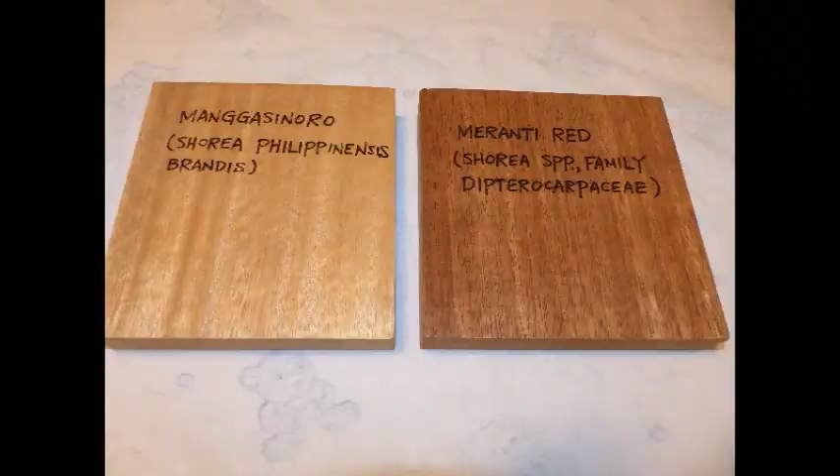This is the stock we're going to use. It's from a project long ago. I used to do fire testing, and this is left over from samples. They're 6" by 6" by 1".

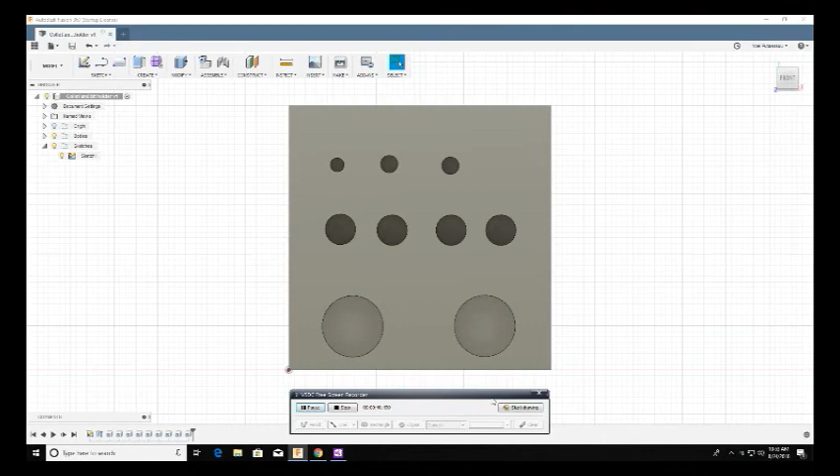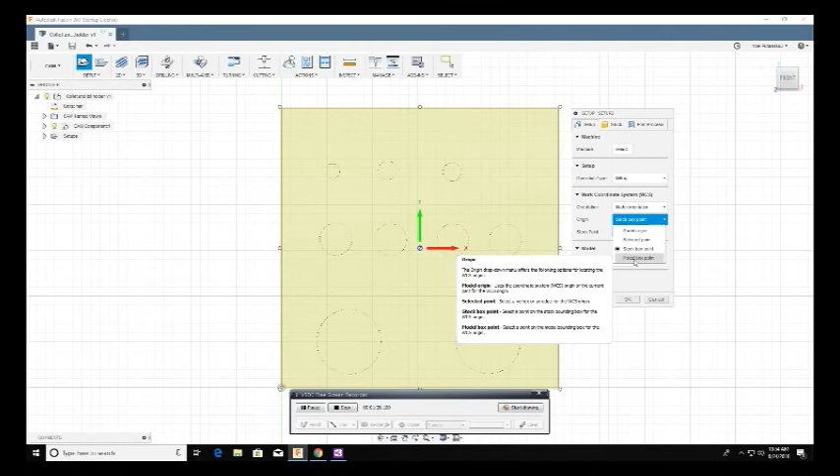I did the model in Fusion 360, and I didn't think anybody would have the patience to watch me model this. But I'm doing the tool runs in Fusion 360, and this is the process that I do the tool runs. So I switch over to CAM, and I'm going to pick the boring tool. Now before I do that, I have to go in and pick the work coordinate system. So that picks the origin, which is going to be at the top of the material, lower left hand corner.

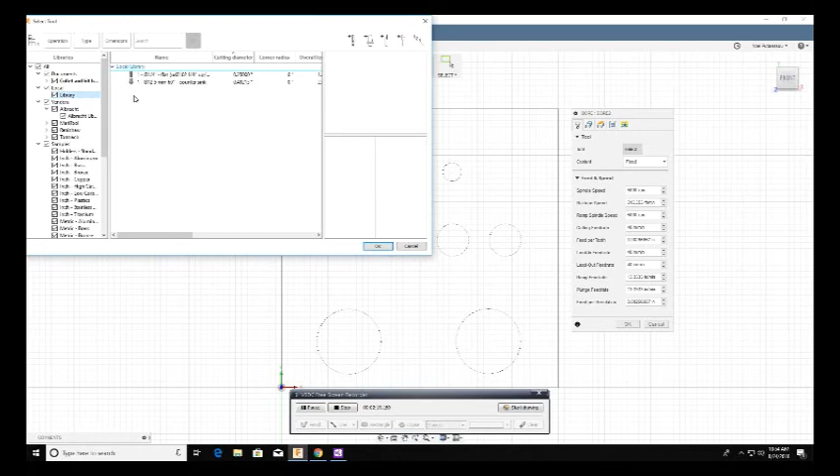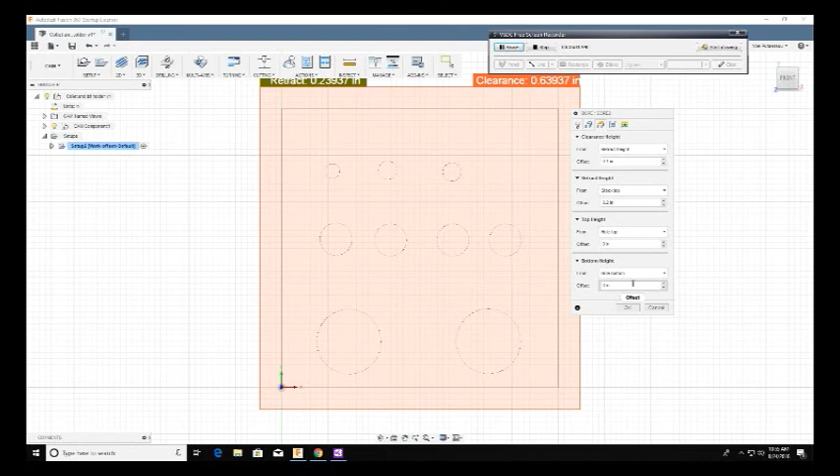And then another thing I have to do is make sure I pick the units, because it defaults to millimeters and currently I'm using inches. The bit I'm using is an upcut 1/4 inch end mill. Once you have the bit picked out, it brings in its RPM and other attributes, and that picks out a lot of the other variables. You just want to go through and make sure they make sense to you, because it does a fairly good job of picking the variables. Now I went through that whole process and didn't pick out my tool paths. So here I am picking out my tool paths.

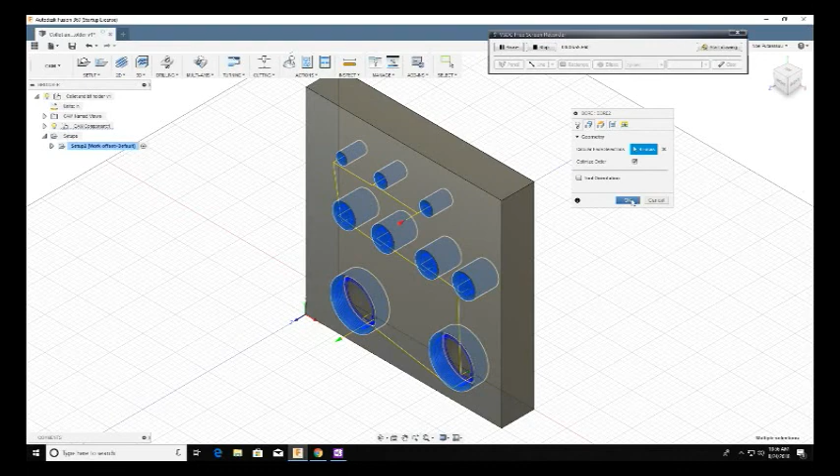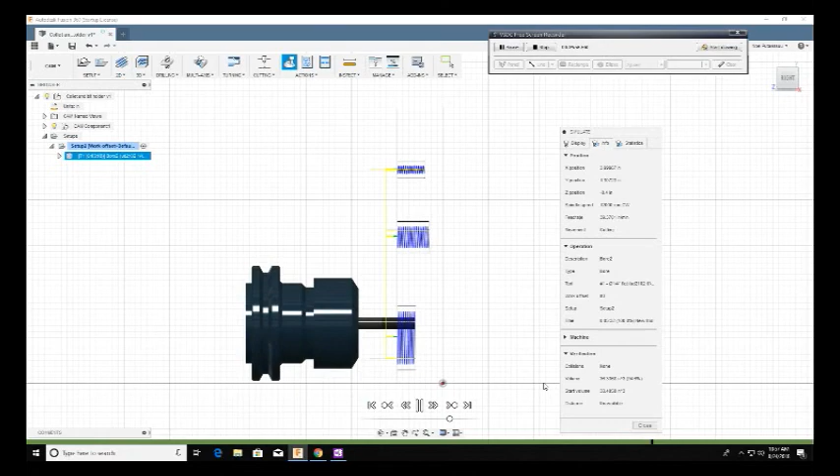I do a simulation to help figure out what order the pockets are going to get cut out, and is the tool going to go through the material. Does it look halfway decent? Because you'll find sometimes when you do the simulation you find a problem that you have to redo it. I always do a side angle so I see if it's going to go through the material. Everything looks okay.

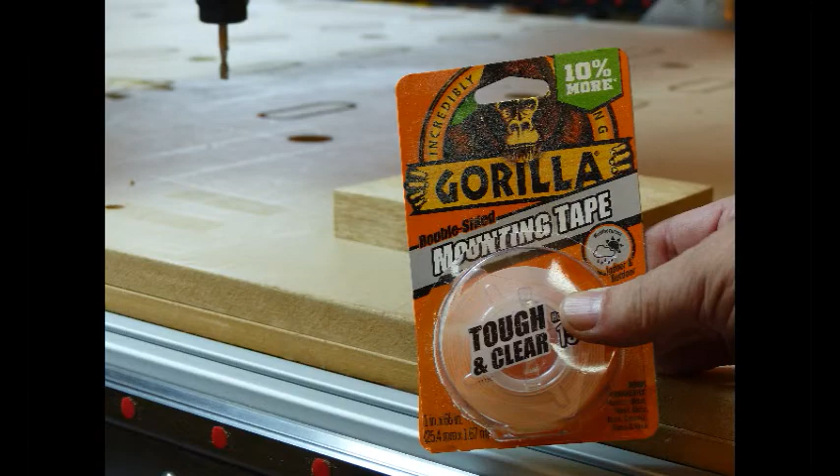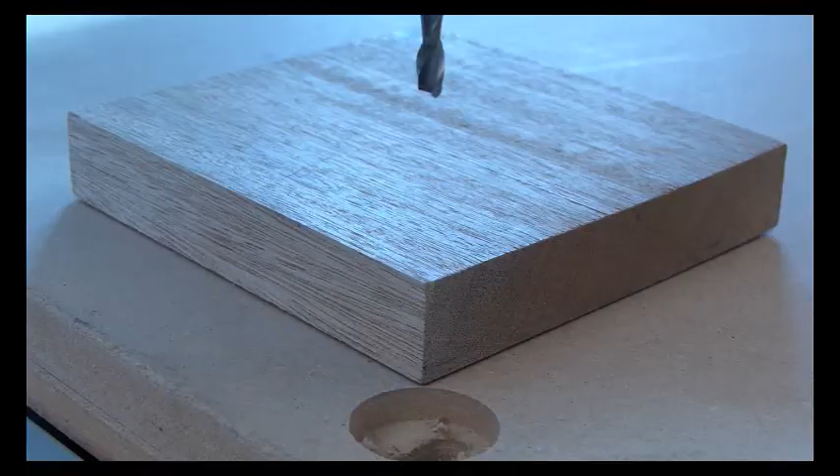Mounting on the spoiler board, I used Gorilla Tape. I find this to be pretty good. There's 2 spots there, and as soon as I touch the stock to it, it sticks. And I have a tough time getting it squared up because it sticks rather well. So I apply some pressure, and it looks like it's there. I also get all the dust off the table and off the stock.

Now I've turned the sound off on the table because it is screechingly loud and would not allow you to hear me over it. So I found that I have to just silence the audio from the camera.

I'm really pleased with the diameter of the circles. These circles, or these holes, are far better than I could drill with a drill press and a drill bit. You know, the character of the side wall is just fantastic. The boring tool does a very good job of making pretty side walls. Yes, the upcut end mill does tend to put some fibers straight up, but those are easy to take down with a sander.

But I'm starting to see a problem. If the hole is significantly more than 2 tool diameters, you'll get a post in the center. And that became evident about here, but it looks like it took care of itself. These holes are roughly 0.74 inches in diameter.

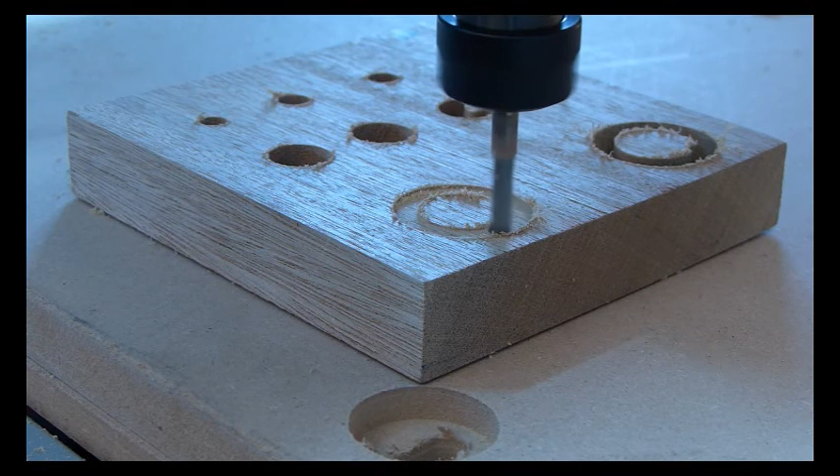These holes are something like 1.4 inches in diameter. Now let me measure. Yes, 1.4. I'm noticing it's leaving a lot of material in the center, so I'm starting to come up with a plan as how to remove that material. And if I don't turn the machine off and I don't re-zero the axes, the machine will know exactly where these posts are. Beautiful round holes.

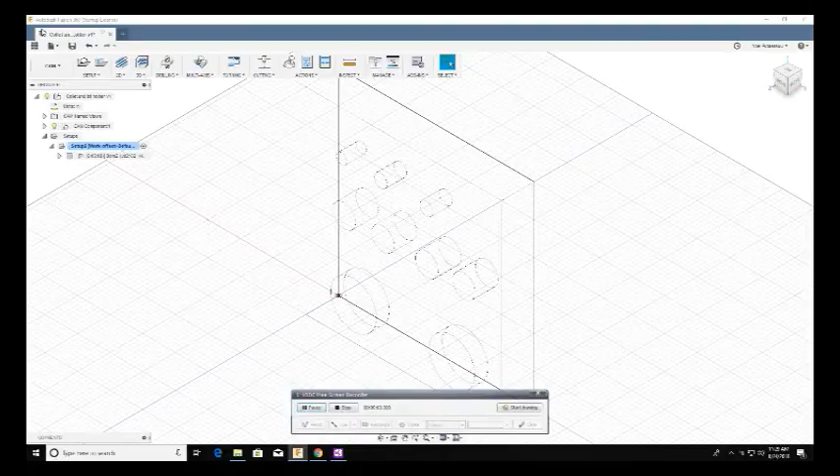Okay, I went back into Fusion 360 and I'm coming up with a new tool path. My experience with Fusion 360 is that I take 2 steps forward and 1 step back, and you'll see that here. I can also talk about climb versus conventional milling. There's a checkbox for doing climb or conventional milling.

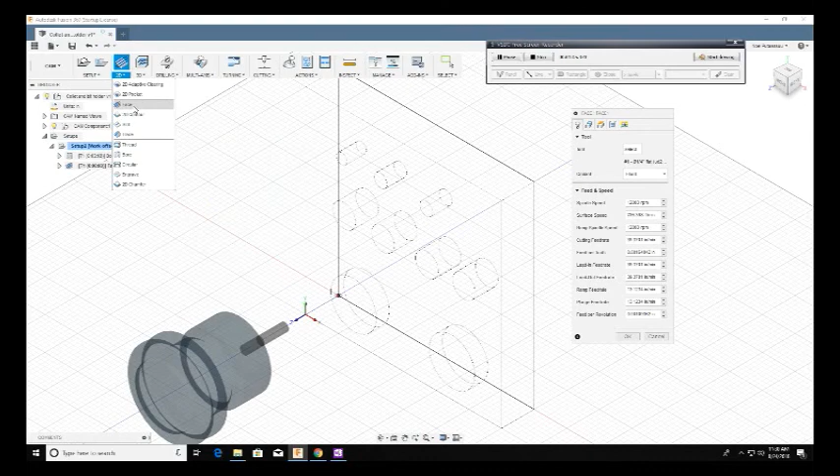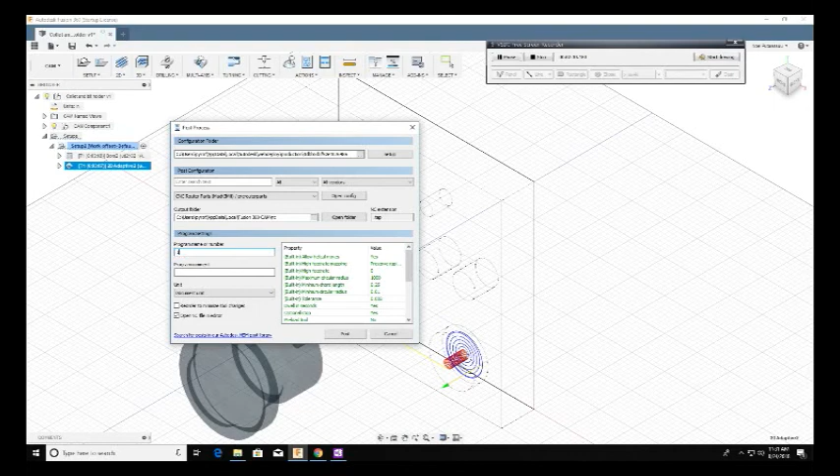If you think of the clockwise rotating bit, on the left side you're working against the rotation on the edge of the material, and on the right side you're working with the rotation. If you're going with the rotation, it's called climb milling, and if you're going against the rotation, it's called conventional milling. And conventional milling appears to have the best finish.

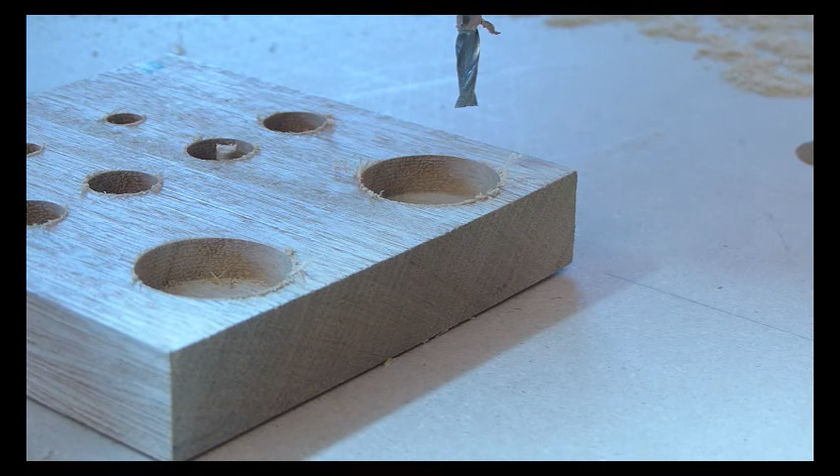It's just cleaning up the floor and then it's done. And I check to see how things fit.

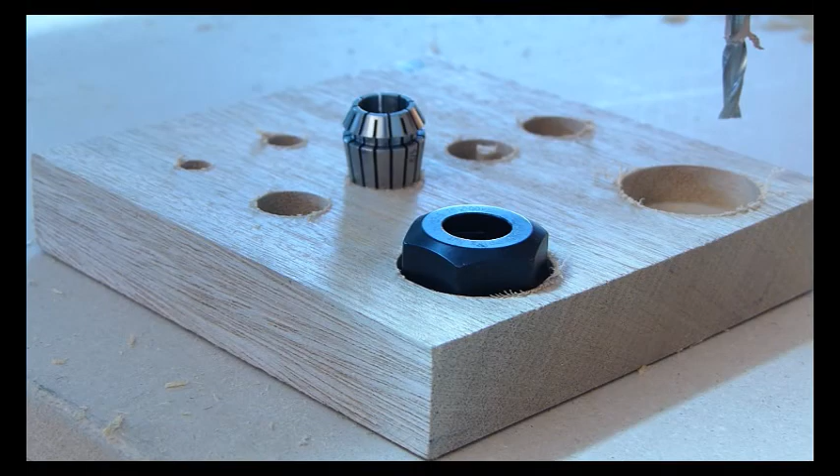This is the redwood, and I'm noticing that my camera is not picking up the red character of the wood. I'm going to work on my lighting. But this is a 1/4 inch end mill, same upcut end mill, and I'm making a hole that is just slightly larger, like 0.3 or something like that. But it makes quick work of the holes. I think I made these 0.6 inches deep.

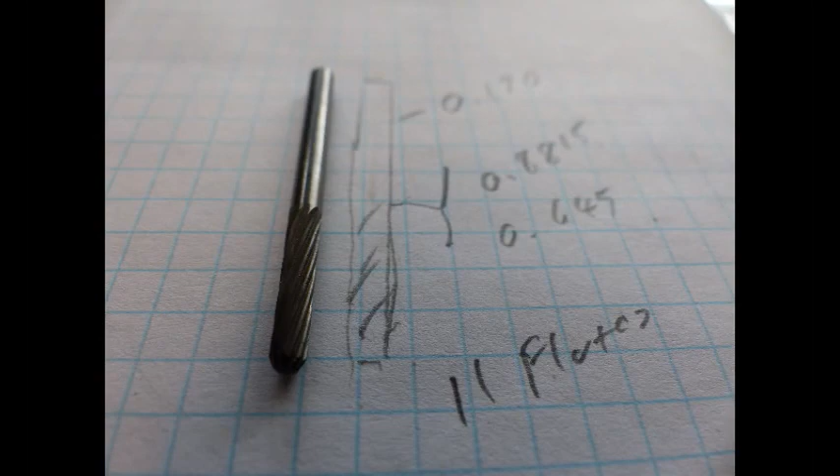Next, I had this 1/8 inch end mill I got in a batch of bits from Amazon. It says made in China. So I made a little diagram so I could describe it to the CAD program. Used a magnifying glass and counted 11 flutes on it. 0.6 inch in length, so it ought to be good for a 0.6 inch hole. And I'm really quite pleased with how this thing makes a 0.2 inch hole.

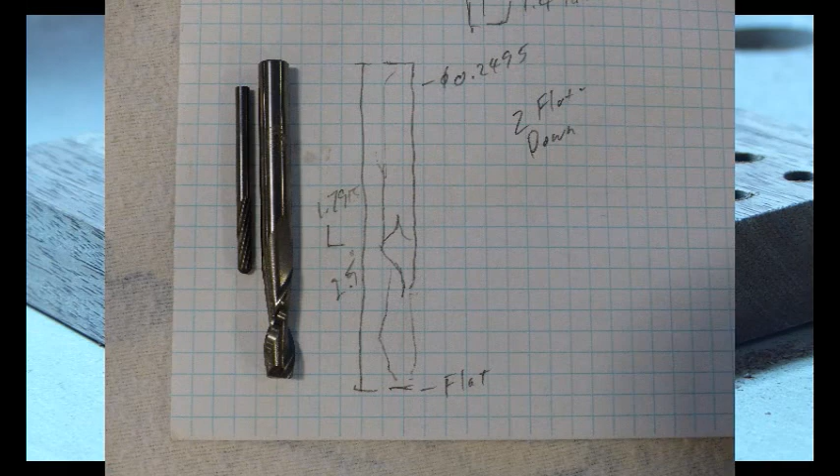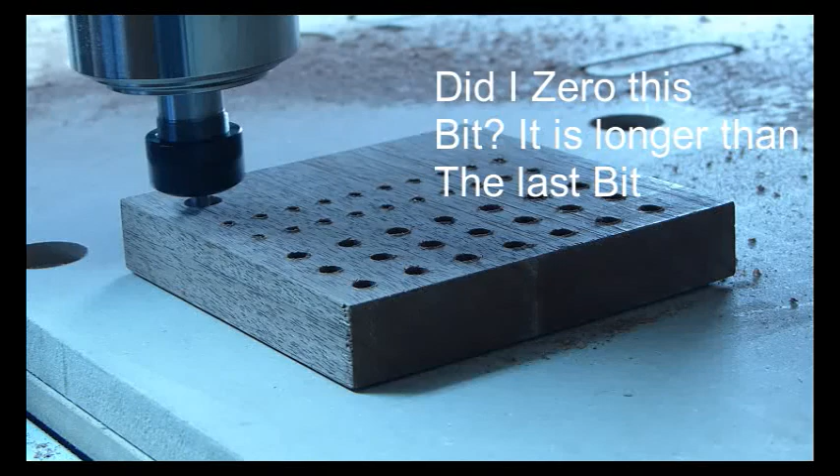Then the next bit I was using, and I put this in to show the difference between the two bits. The next bit I have is a 1/4 inch down cut. Actually, I have a 1/4 inch up cut. I think I used a diagram from a different bit, but it's very similar. And these were 0.6 inch holes or 0.55 inch holes. And I'm starting to see a problem. Man, it's going deep. Dang it.

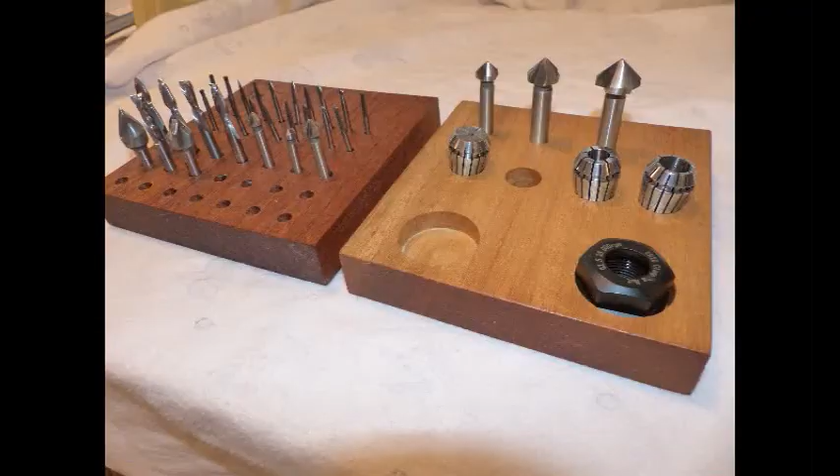This is the finished product. This is something anybody with a CNC machine could use.

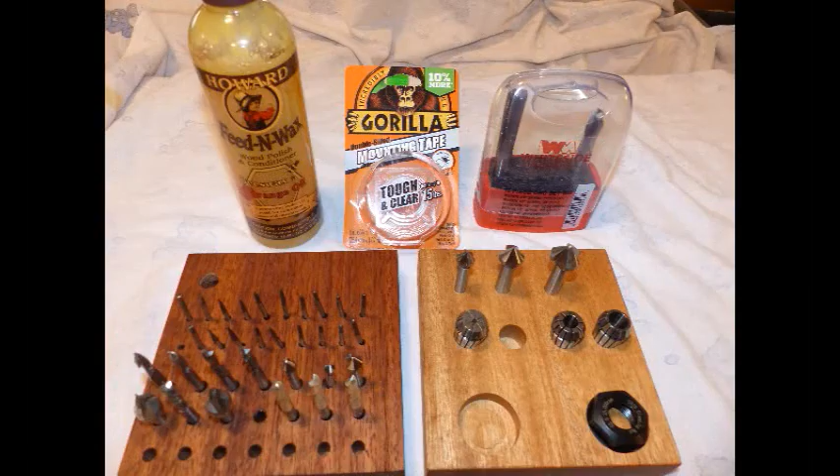I use Feed-N-Wax, beeswax with orange oil. I use Gorilla mounting tape and the Whiteside end mill. I use Autodesk Fusion 360, ArcSoft, Mach 3, and my video editing software is VSDC. My routing machine is a CNC Router Parts Pro 4896.